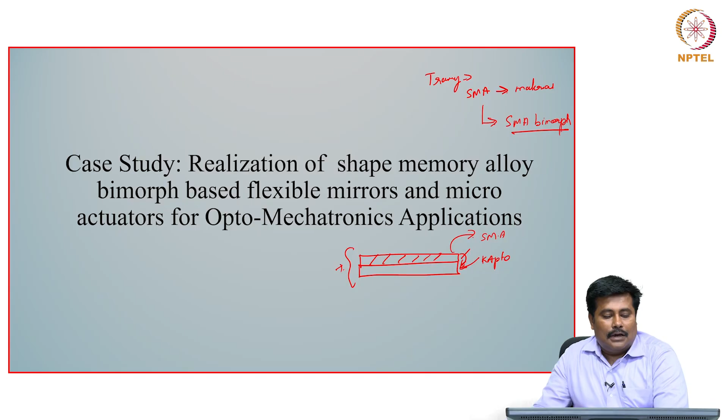With this as an idea, we had developed a small Stewart platform for micro robotic applications, which is used for beam steering. Let us see this particular case study and discuss the different processing steps and evaluation involved in this particular process in detail.

Now, the key motivation of this particular case study is that in most flexible mirrors, for example if we have a mirror of a large area, normally these mirrors are looking for some kind of dynamic actuation, so these mirrors are integrated with a kind of actuator.

In most cases it might be a kind of hydraulic actuator. In some cases it might be a kind of mechanical or linear electrical actuator. In certain cases it might be a kind of piezoelectric actuator, based on the response normally considered.

So, the element of reflectivity is different, the actuator is different, and the actuation characteristics will take care of the overall reflection behavior. Now, in this particular case, what we thought is, if we need to make the system simple, why don't we prepare a deformable mirror which can be actuated, which has its own capability towards actuation?

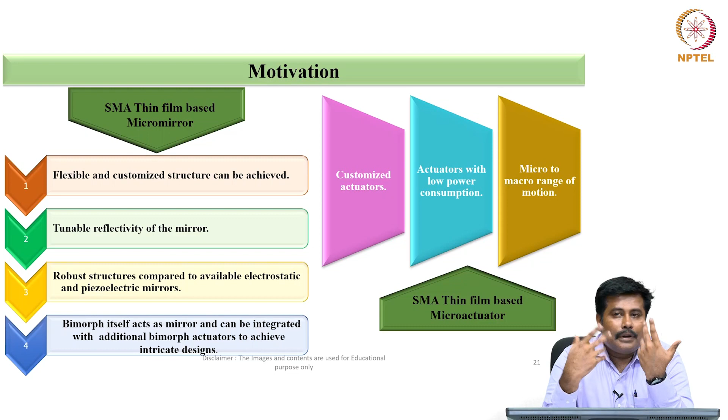That is, if we can go for a high reflective shape memory alloy thin film, so that this thin film has a capability to get actuated appropriately.

So, one of the key concepts is that we will make a flexible and customized structure, and then develop a mirror with a kind of tunable reflectivity, so that this tunable reflectivity can be efficiently deployed for deflection or for manipulating the beam based on the requirement. A third important point is the robust structure compared to the available electrostatic and piezoelectric mirrors.

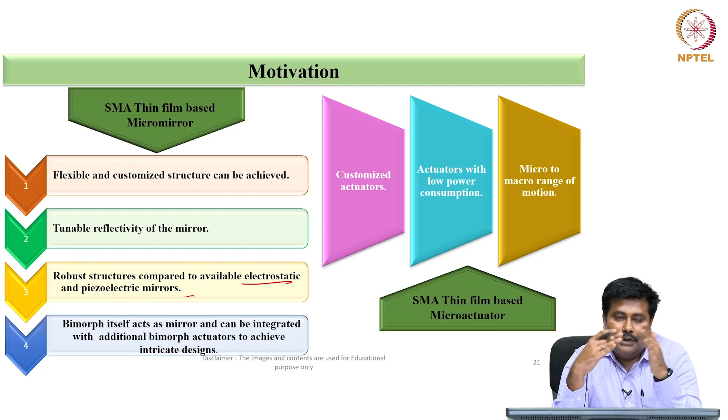So, it can act as an alternative to electrostatic and piezoelectric mirrors, because in the case of electrostatic or piezoelectric mirrors, it has a higher order frequency, but with respect to linkages, we may need to connect an actuator on the mirror. So, these become two different elements, and these two elements get actuated to get the required motion.

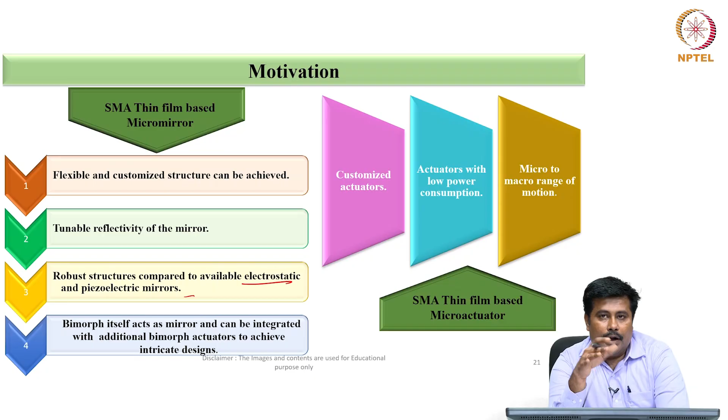Now, if we can design a system where a bimorph itself can act as a mirror, and it can be integrated with an additional bimorph actuator to take care of the intricate design, the overall load of this Stewart platform can be considerably reduced, and it should have higher flexibility. So, one of the key objectives or outcomes of this particular project is to develop a customized actuator.

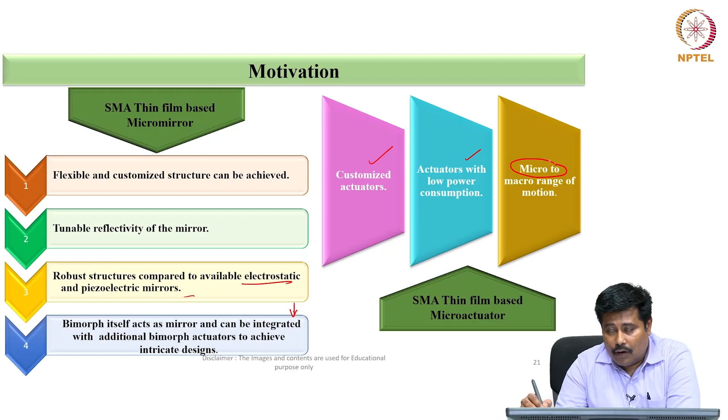Second, an actuator with low power consumption, designed on a micron order, however it has the capability to go for macro range motion. So that is the thought process.

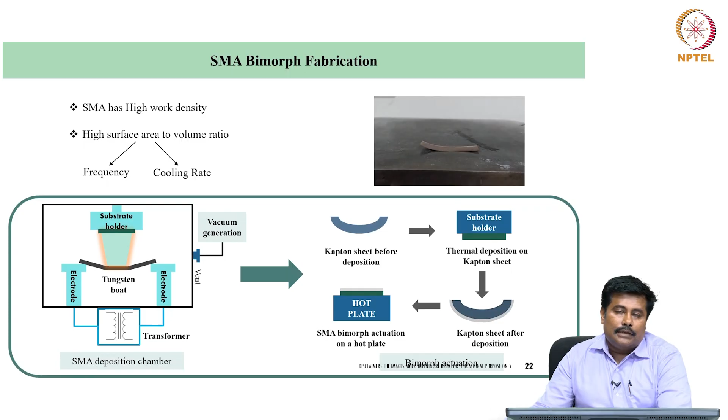Now let me introduce you to this shape memory alloy bimorph. We have already seen that shape memory alloys have a high work density and a high surface area to volume ratio, so they have a capability towards high frequency and cooling rate.

What we are trying to do is use this SMA deposition chamber. In this chamber there is a tungsten boat, which is a kind of thermal deposition unit. This thermal deposition unit can be used to deposit the shape memory alloy structure.

One important point to consider is the feed material we are planning to use, based on the composition we get powders. For example, if I want to make a quaternary or ternary alloy, I can take Ni, Ti, Cu, etc., and make it in the form of a pellet in an arc melting chamber.

In the arc melting chamber we make a pellet, and this pellet can be integrated with the tungsten boat, and then we supply electrical biasing through this. Through this electrical biasing, the material gets melted and deposited on a substrate holder. The entire process happens in a vacuum environment.

Since this system is called a flash system, power is instantaneously applied to the tungsten boat, so there is rapid heating of the material and rapid evaporation of the material on the surface.

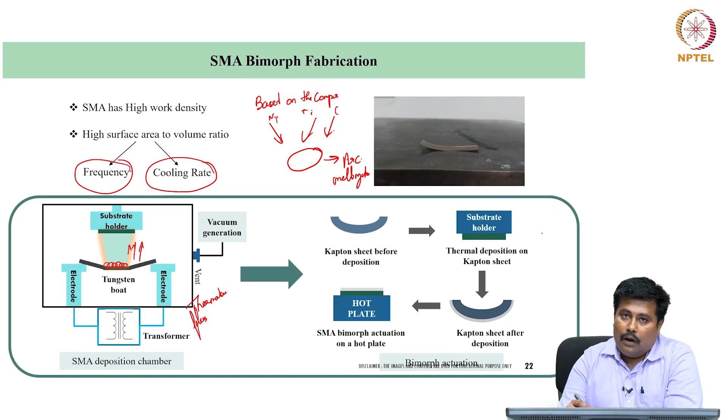Now if we try to see the overall mechanism, this is a kind of Kapton sheet which is used. This Kapton sheet is initially in a curled phase. When we put it on a substrate holder, we straighten it. So a shape is already preset in this Kapton sheet, and using the substrate holder, in this preset condition, we straighten it and then go for thermal deposition.

In this thermal deposition, the thickness of the material will be less than 1 micron, close to around 0.25 to 0.5 micron, where the deposition happens so that it takes the curl shape of the Kapton sheet. After deposition it gets curled, and when we put it on a hot plate, it gets biased.

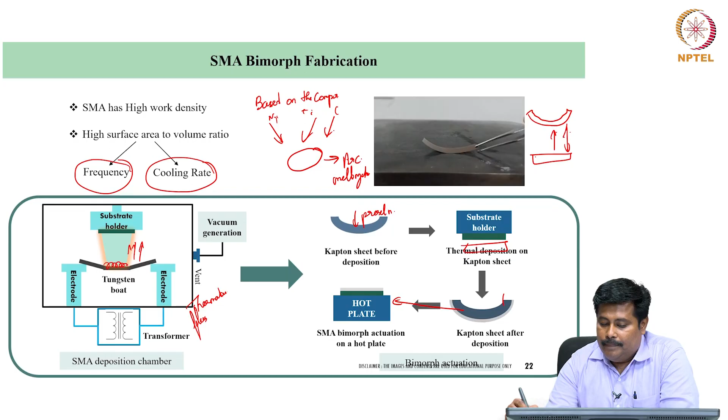As far as this bimorph actuation is concerned, you can see over here, this is on a hot plate. When we put it on a hot plate, it becomes straight. When it is taken into an open environment, it takes a curved structure. That is the switching between the actuation domains.

Now in order to preset this particular shape setting on the SMA bimorph, two different techniques have been followed. One technique is that we take a Kapton polyimide and strain it using a fixture, and the straining is done in a tensile testing machine, where it is further placed within a two-pulley arrangement in this particular fashion.

This pulley arrangement is such that the shape setting will be continuously deployed during the deposition, so this pulley will always be in a kind of strained condition. This is what we call programming the shape memory alloy for our requirement - how much frequency we require, how much displacement we require, appropriate straining is deployed here.

Now we have a kind of boat arrangement, where we have already kept the pellet which has been manufactured to the requirement of an appropriate composition. A kind of electrical biasing is applied on it, capable enough to cause continuous evaporation, resulting in continuous deposition.

Since you have a pulley arrangement, these pulleys are connected with the motor, and the motor to the idler pulley, and when the rotation happens, there is continuous deposition of the material, resulting in a deposition belt. The overall deposition is in the form of a sample size close to around 2 cm into 50 cm belt, at a deposition pressure in the range of 2 into 10 power minus 5 millibar.

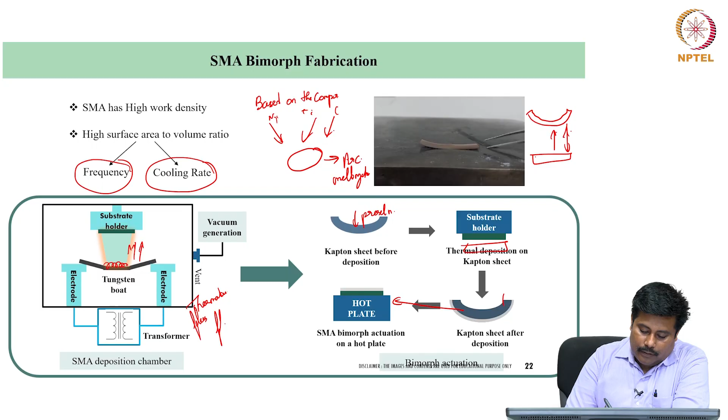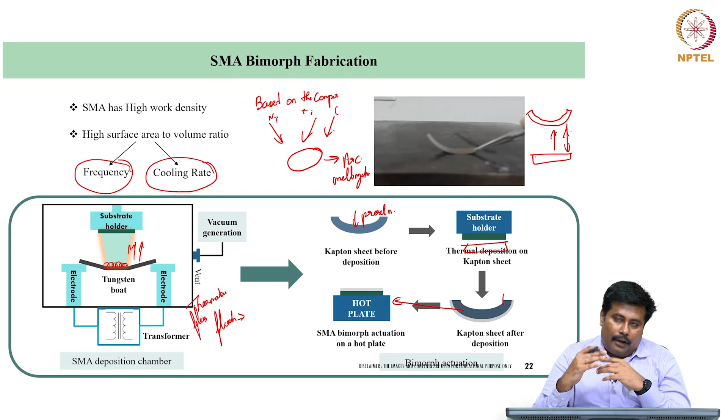Now this is the case where earlier we used flash evaporation. Wherever we want to make a bimorph, we go for this flash evaporation, that is, wherever we want a low density film that will not be highly reflective, however it has better actuation. So for better actuation property, such thermal evaporations are deployed.

However, wherever we want a high density film, we can deploy an E-beam based system. In this E-beam based system, we put the source over there, and using an E-beam, the source is evaporated, resulting in a continuous evaporation which happens, and because of this continuous evaporation, there is going to be a thickness in the overall structure.

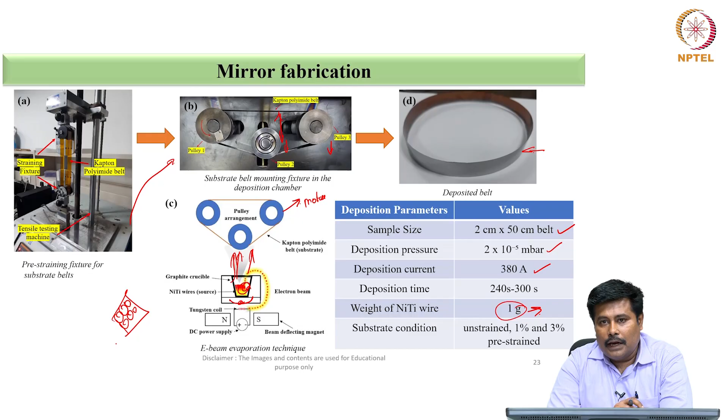This thickness results in, per unit area, a more amount of high density structures which will be fabricated over here. Because of these high density structures, you get a high density film which exists.

So in this high density film, these are the different process parameters which are employed. Since an E-beam is used, these E-beams are capable enough that a good amount of energy is imparted on the material, and this material starts depositing, and finally, like shown before, here also we have a kind of Kapton polyimide. These Kapton polyimides are strained appropriately so that there is a continuous deposition which exhibits over here. Because of this continuous deposition, you can have a thicker high density film which is almost equivalent to a kind of mirror established over here.

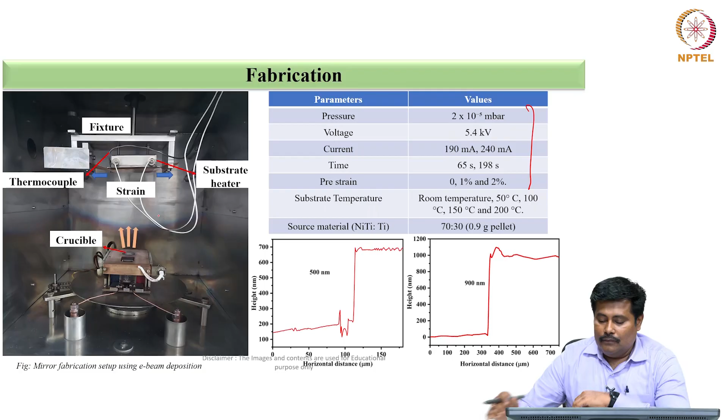So this is a kind of customized system. It's a kind of PVD based system which is being deployed. Regarding PVD, we had discussed a lot in the microfabrication.

In order to get this repeatability cycle, we keep the SMA bimorph, and the overall repeatability of the structure can be monitored using a laser displacement sensor. In this laser displacement sensor, the light is made to interact on the tip, and when continuous actuation happens, there is a reflection which persists, and from the reflection we can estimate the overall cycle.

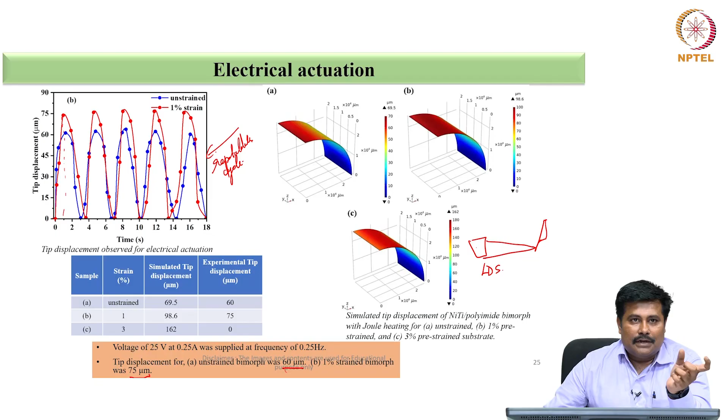As far as displacement is concerned, we can have control over the displacement. Roughly the displacement is in the order of micrometers. So basically from 60 micrometers to 75 micrometers can be easily established using this particular SMA bimorph. However, the overall actuation characteristics or frequency characteristics can be efficiently catered by changing the thickness. By appropriately changing the thickness and the strain percentage of the Kapton polyimide, we can have a higher order frequency what we are looking for.

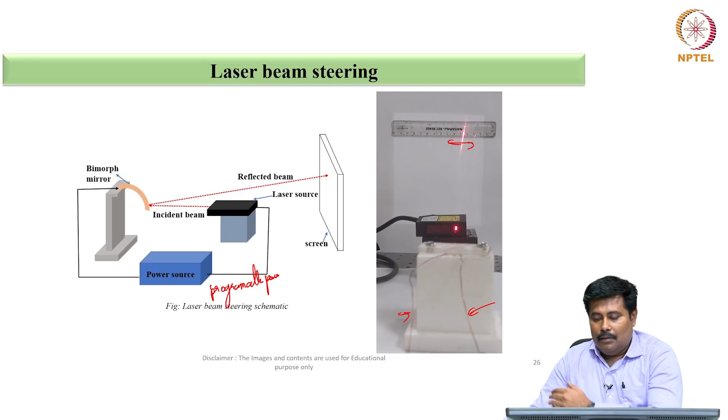So this is a laser interacting with the bimorph, and this bimorph is reflecting it. The bimorph is over here, and the connection for the bimorph is taken through these leads. From the reflection you could see the overall sweeping of the mirror which happens. So the mirror gets swept and appropriately it is used for reflecting the beam.

Now one of the microfabrication steps followed here is inducing a kind of roughness on this polyimide substrate in order to improve the efficiency. You may ask a question like, whenever such bimorphs are prepared, there is a question of adhesion, because these are two materials being bonded using a coating technology, and when we try to actuate it, there is a chance that this film may peel off.

When discussing this substrate selection, I had discussed two different types. One is substrate integrated with the SMA, where both substrate and thin film work together resulting in actuation. The other technique is where the substrate and the SMA are such that the SMA can be peeled off and the substrate can be used separately.

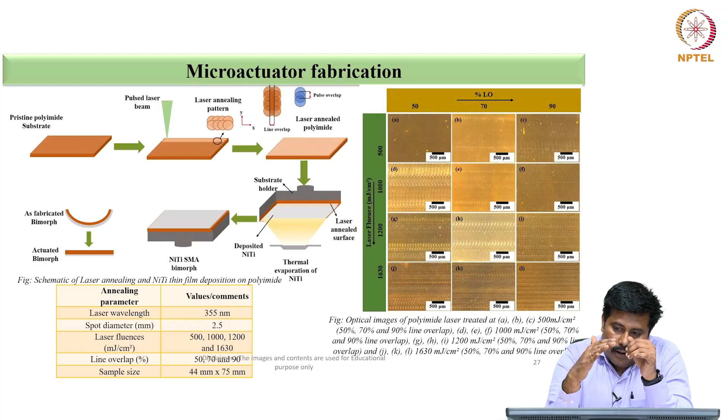Now in this particular case, in order to improve things, we are trying to work on the frequency. If you are trying to use it for a mirror application, one important aspect is we may need to run it at a higher order frequency. At these higher order frequencies, at any cost there should not be any peel off of the material. That is one important aspect.

So there are different techniques deployed to improve the adhesion. One approach is to go for a plasma treatment of this polyimide so that the adherence of the polyimide will be improved, and appropriately when we go for a coating, we can get better characteristics. Another method is to go for a kind of pulsed laser crystallization.

Using pulsed laser crystallization, we can modify the surface based on the requirement, and then we go for a coating. Once we go for a coating, these modified layers will act as an anchoring medium. So in this anchoring medium, once you go for a coat, this anchoring medium will have a greater amount of adhesion.

That is, we are trying to manipulate the surface to volume ratio appropriately so that you can have more adhesion. With more adhesion, you can have a larger life cycle, which is what we are looking for. So this is the overall set of steps which are being followed.

This is a pristine polyimide substrate which is integrated with laser annealing, and then with the laser annealing, the deposition is performed using thermal evaporation. With the thermal evaporation, an NiTi SMA bimorph is formed, and the as-fabricated bimorph and the actuated bimorph are integrated over here.

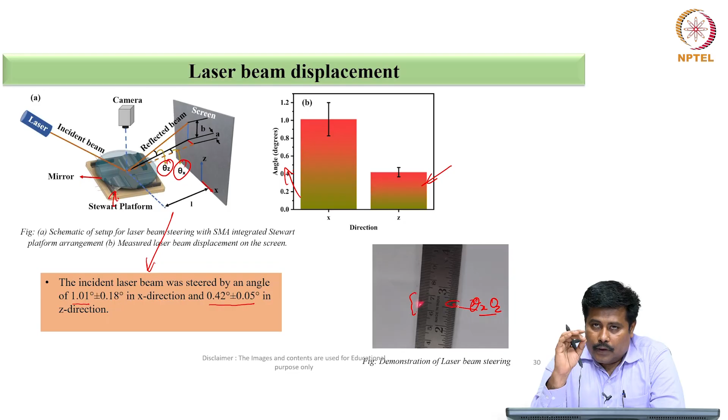This is a closer view of the laser beam steering. If you closely observe, the overall deviation is well controlled, so there is no undulation in the system, and theta x and theta z are well recorded. The overall micro manipulation is in the order of close to less than 100 microns, which is the observation here.

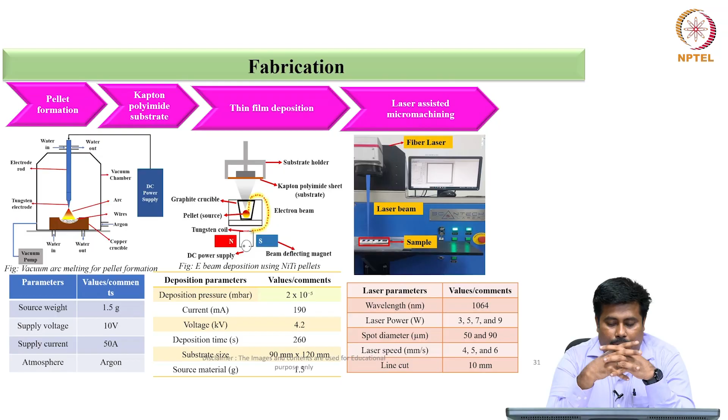Now let us take one of the sub case studies. In this case study, what we are trying to do is fabricate a kind of SMA based optical shutter. The main application of this optical shutter is that it opens and closes, and it restricts the overall interaction of light inside a particular system. In fact, the optical shutter looks something like this.

In order to fabricate this, we are fabricating the SMA bimorph. In this SMA bimorph configuration, through vacuum arc melting, the concerned pellets are made, and these pellets are used as source material for thin film deposition. In this thin film deposition, there is a graphite crucible, and the source material is applied.

Since it is used for optomechatronic application as discussed earlier, we may need a high density film. To get a high density film, an E-beam evaporation technique is deployed. In this E-beam evaporation technique, we get a strip of SMA bimorph, which we may need to dice based on the requirement.

Since we are looking for a kind of micro level actuation, it is easy to fabricate such micro level processes using a kind of laser. This is a kind of fiber laser which is used.

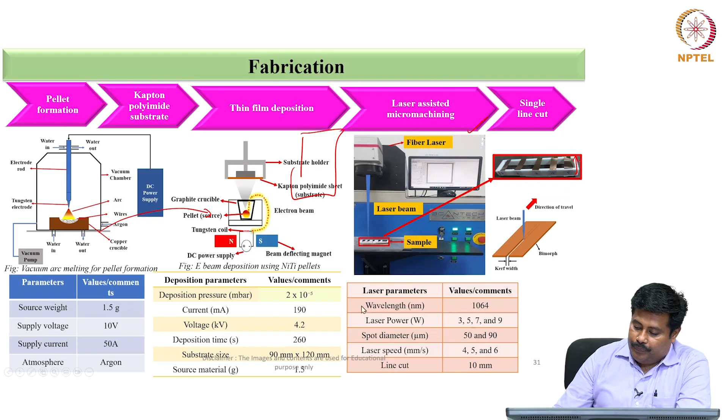During the overall process, these SMA bimorphs are strained, and a laser beam is used to interact with the bimorph, and appropriately it is cut. Different laser parameters are used, and this is a kind of SMA bimorph which is being fabricated. You can see a closer demonstration, a closer video over here. This is an SMA bimorph in which the concerned features are cut using a laser.

So this acts as a petal. These petals are fabricated using a laser.

Based on the type of configuration, different molds are used for fabricating such kind of structure. This is a kind of mold which is deployed for the large area process, and this is a kind of mold deployed for a circular process. So these are some of the various configurations being deployed.

One set of configuration is in the form of a triangular form, and another is in the form of a lotus petal kind of form. The connections are established such that the overall leads are taken in these particular dimensions, and the leads or contacts are established so that instantaneous opening and closing takes place.

However, there is a possibility to have a different configuration in this. In this configuration, individually these systems can be connected, so that there is a kind of individual actuation which happens. For example, you can have multiple relay structures.

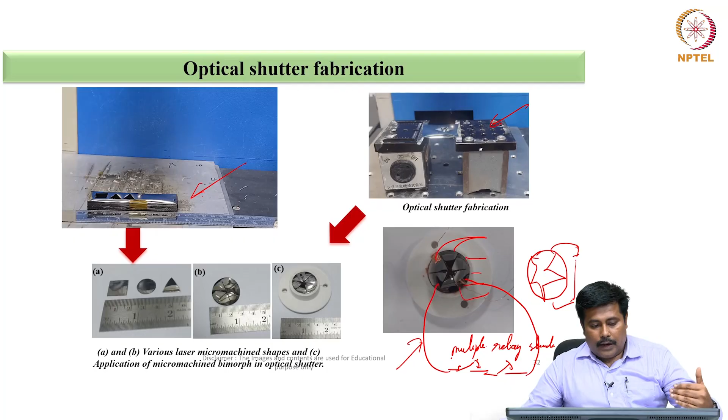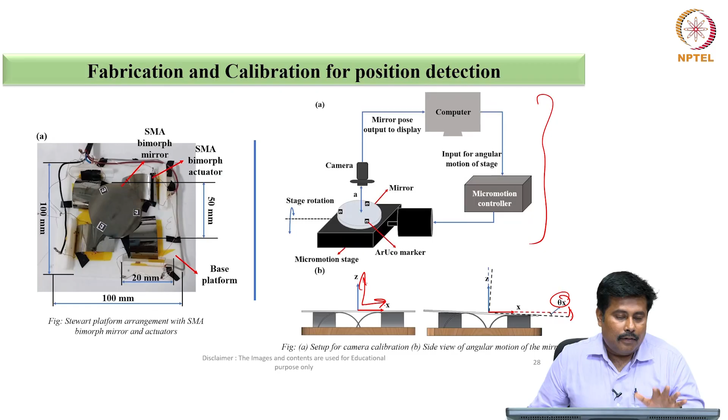This talks about a kind of micro robotic platform developed for optomechatronic applications, and what stages are involved in developing such a micro robotic platform, especially the different stages involved in micro fabrication, and then how the reliability and life cycle behavior of these structures are deployed, and how close the features are being generated. So this is just to give you an overview and feel about how micro robotic structures can be fabricated.

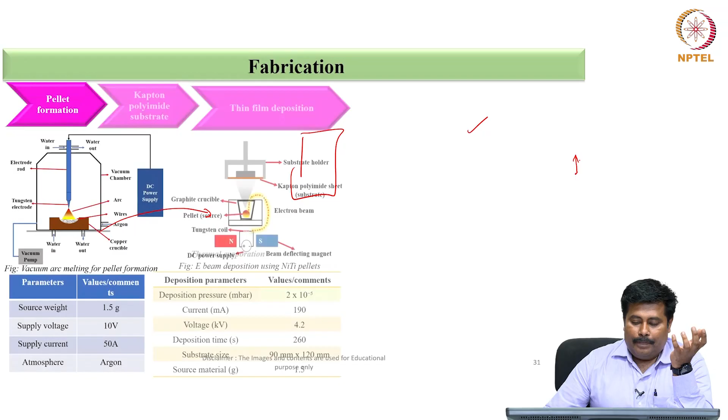Now we will discuss the overall limitations of these shape memory alloy structures. We have discussed in detail starting from the overall configurations, the types, and the reliability about the different devices. One of the major limitations of shape memory alloys is high cost of production.

Especially from an industrial perspective point of view, that is the reason the raw material cost is quite high. Second, it has a slight complexity in machining of SMA.

As I mentioned earlier, if you take a small rod or a small sheet and try to do drilling in this process, whenever I try to impart heat on this material, it will try to get deformed and regain its shape. So it is very difficult to hold this material for a longer period, which is one of the key challenges when we try to use such materials that are highly sensitive to heat.

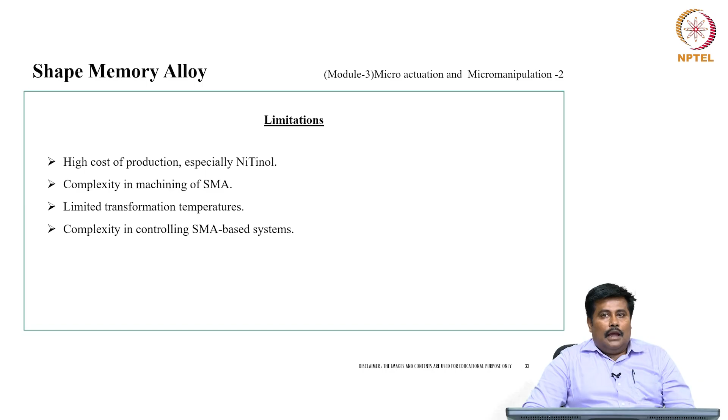However, it has its own complexity and limitation towards transformation temperatures, and complexity in controlling SMA based systems. Strategically these materials are well represented in different defense and space related applications, owing to their capability as smart actuators, smart sensors, smart microsystems, smart micro robotics, etc.

However, from a future perspective, there is a possibility of exploring a cheaper alloy, and currently 3D printing has taken up a shape in fabricating such shape memory alloy structures. However, with the 3D printing process, there is a chance it is very difficult to maintain the functionality of these shape memory alloys. So still, 3D printed shape memory alloy structures are not commercially available, which may be a future prospective direction where 3D printed structures may come up and take shape.

And these kind of 3D printed structures can be integrated with material for appropriate integrations, and then more applications can be taken up.

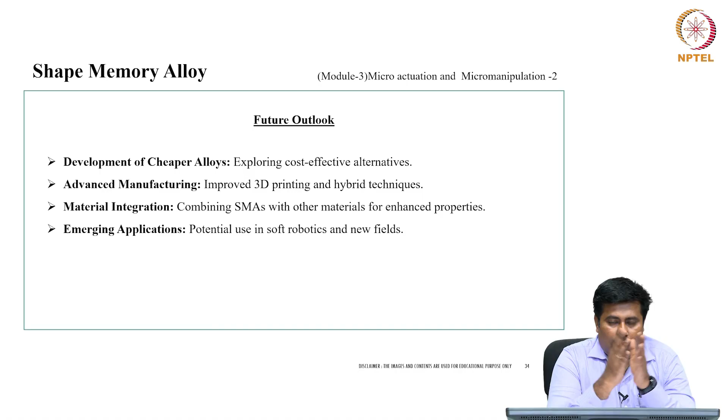The most important challenge with reference to field perspective is the training part. Currently the training is overcome either through this bimorph or through a kind of strainability, etc. But if a simple training technique can be followed, that will open up a new domain for usage of these kind of actuators for different applications.

And second important point with respect to shape memory alloy is that, whether it is on a micro level or on a macro level, it almost behaves in the same fashion.